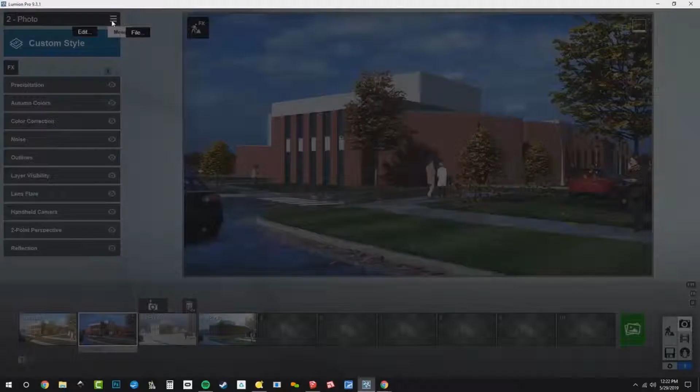Last part of this is going to each one of these. We've got summer, and then we've got our fall. Let me go to File and choose Save Effects, and since we didn't save our fall yet, I'm going to call this one Brightman Designs underscore crisp fall.

Then we'll go to this one, and I'll go to File, Save Effects, and call this one... let's see, File, Save Effects, and we're going to call this one BD underscore dreary winter. Then we're going to call this one a wet spring, so File, Save Effects, and call it BD underscore wet spring.

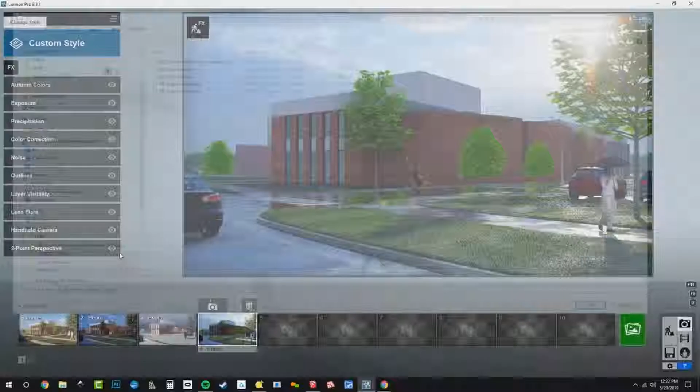Okay, so we've got all of our effects out. I think these images are looking really cool. What a variety you can achieve here. Lumion is super flexible for creating any mood, any vision, whatever it is you're going for. It's so quick and easy to create and paint that picture.

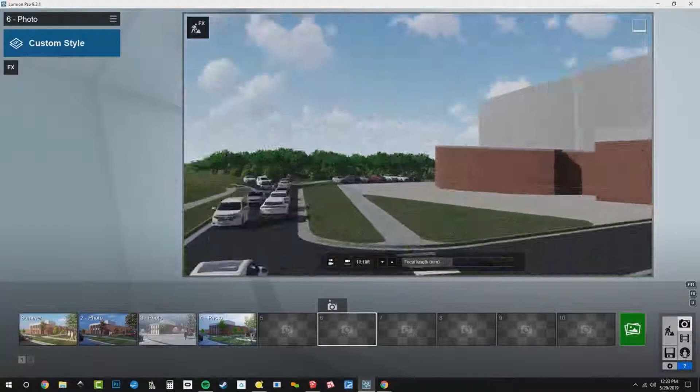So if I wanted to make another view, I could just hop over here to a new camera, and maybe take a quick snapshot, zooming in closer. This is going to be a little tricky, but if I get a close-up like this and set our eye height like that, that could be kind of cool, something like there.

All right, so I'll take a snapshot, and then all I need to do is go to File and choose Load Effects, and I'm going to load up our hazy summer, like that.

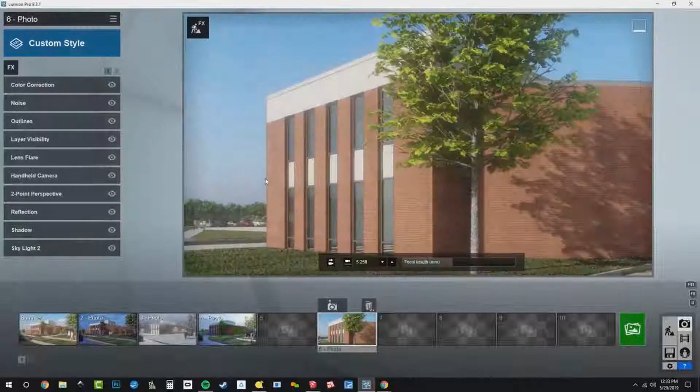I'll snapshot my view, File, Load Effects, and we're going to go with Crisp Fall. Then I'll snapshot my view again, File, Load Effects, and we're going to go with our dreary winter. Last is going to be snapshot our view, File, Load Effects, and that'll be our wet spring.

So you can see how quick and easy it is to use these effect stacks over and over and get all these different looks going. Once you set it up, it's yours. And of course, we are sharing all of these effects - I've shared all the secrets. I'm moving fast today, but everything is perfectly and clearly laid out in our tutorial.

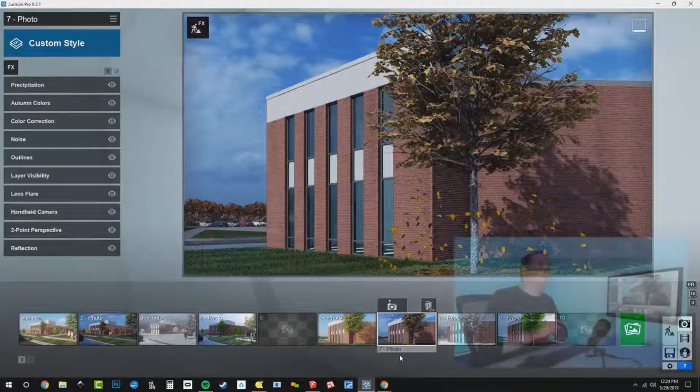So let's do this. Let's go over here to our render photos page, and you can either render the current shot or render the entire set. I'm just going to do 1920 by 1080 - that's usually how I do my test renders. Then I would do 3840, or 4K, for print. All right, so let's do this.

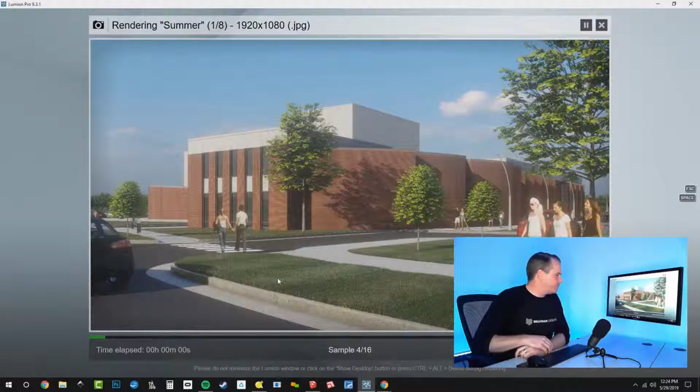I'm going to send these to my webinar folder and say 1905 29, enter. Now what this is going to do is move through this entire set, every single scene that I've set up, and render it out, just moving through it. So let's do that, and I think I'll say some closing words while we render, and maybe we'll take a lap through all of these renders and see what we got.